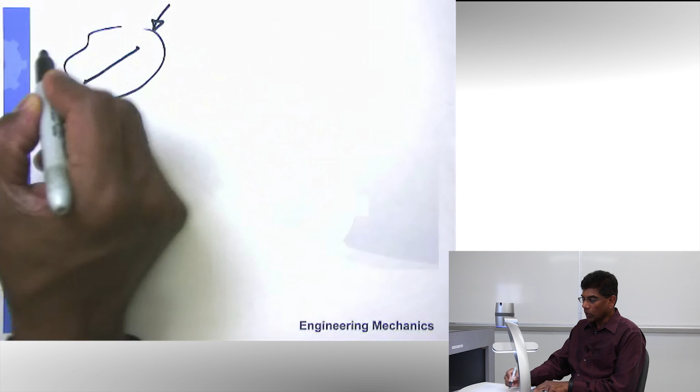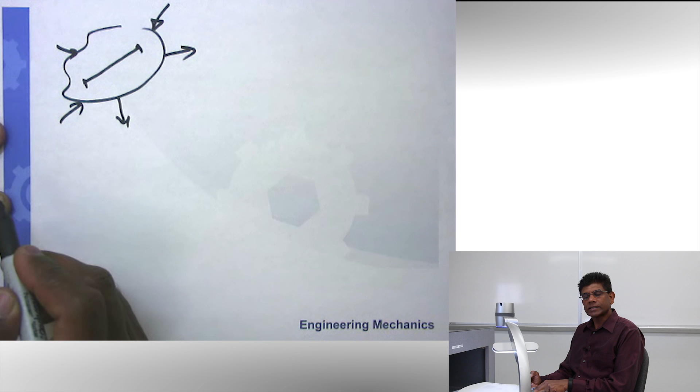And if you want a better way of explaining, here is an outline of a rigid body. I pick up 2 points on the rigid body, connect them by a line, subject this rigid body to some loading conditions, all right? And then I look at that line, it does not change the dimension. So a rigid body is a body that does not change its dimensions under the influence of forces. Any small internal deformation that takes place is not important from our perspective because it does not have any bearing on the static equilibrium. So that's rigid body, all right?

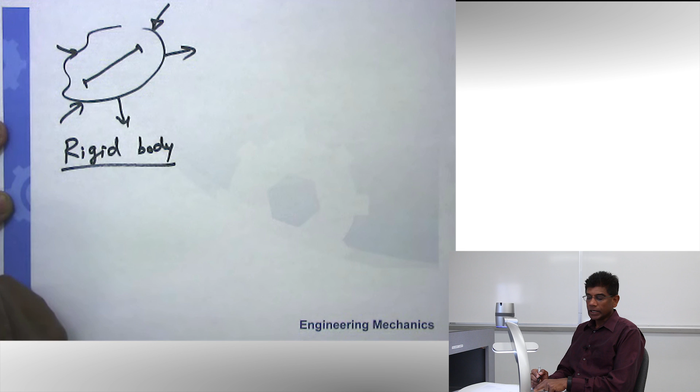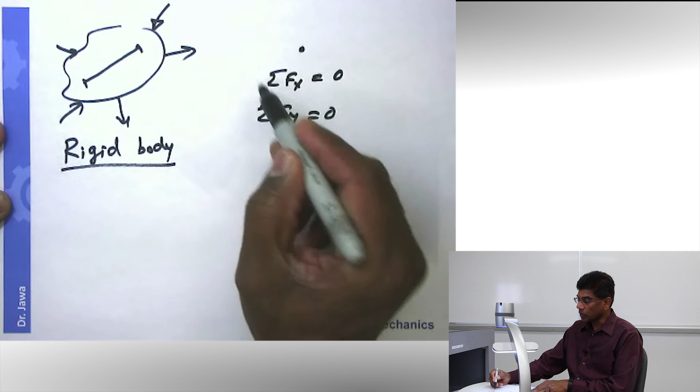Now, the next step is we briefly talk about the equilibrium conditions. Now, I want to draw your attention to what we talked before. We discussed particle equilibrium, meaning a system that is represented as a concentrated mass, and in those cases, we wrote the equilibrium equations as these: sum of the forces along x direction equal to 0, and sum of the forces along y direction equal to 0. In other words, we had two equations and we could solve for two unknowns. And we have done some examples and you understand that.

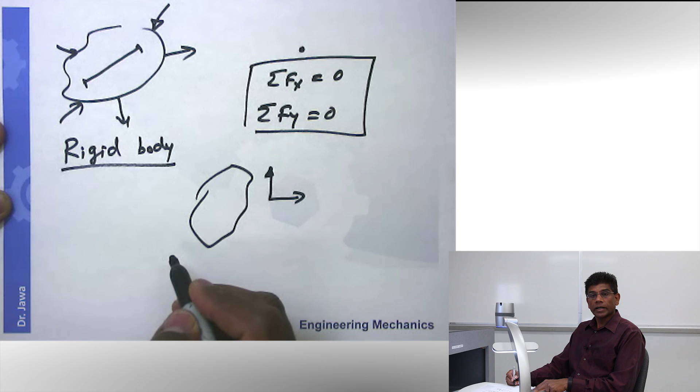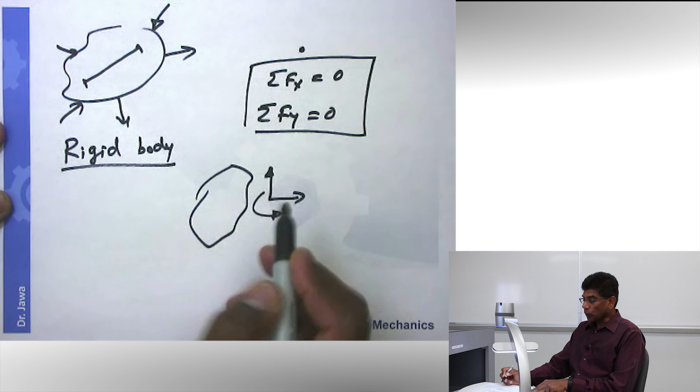Now, we are moving on to rigid body equilibrium. And in rigid body, we are considering not only the mass, but we are also looking into the dimensions. So this rigid body, in theory, will have motion along x-axis, motion along y-axis, and a rotation about z-axis. And therefore, in order for this body to be in equilibrium, we have to make sure sum of all the forces along x and y is equal to 0 as well as the moment.

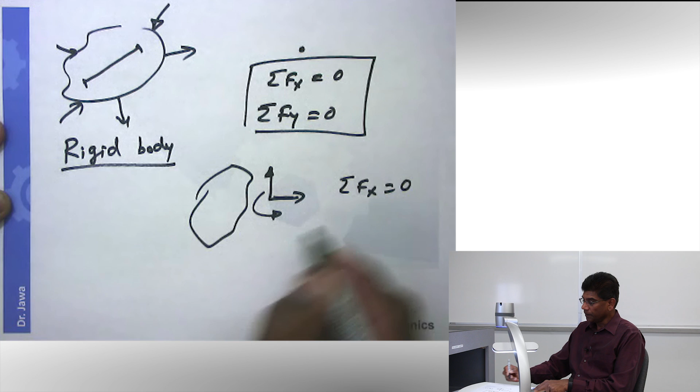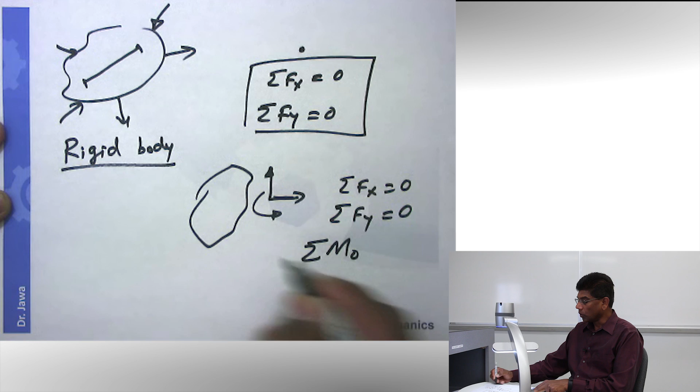So our equations for a 2D rigid body equilibrium will be sum of the forces along x direction equal to 0, sum of the forces along y direction equal to 0. I'm writing the scalar equations. And then sum of all the moment about a point, for example, O, equal to 0.

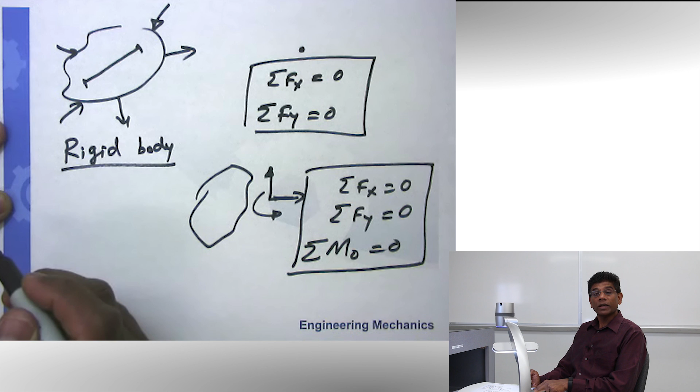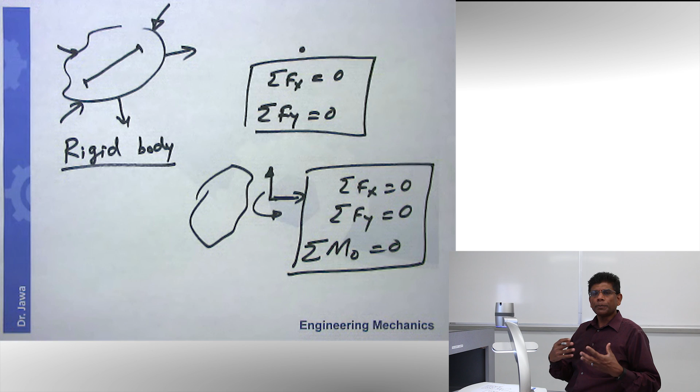So we will have three equations in case of two-dimensional rigid body equilibrium problem, meaning we can solve for three unknowns, all right? Lastly, when we look at a rigid body, these rigid bodies are not floating in space. In engineering, in fact, a body just floating in space is of not important. We like to get the bodies interconnected so they can do something useful. So all bodies that we talk about in engineering are somehow connected. So in this case, let's take a look at the supports that we are going to be considering in this subject. All right, so support reactions.

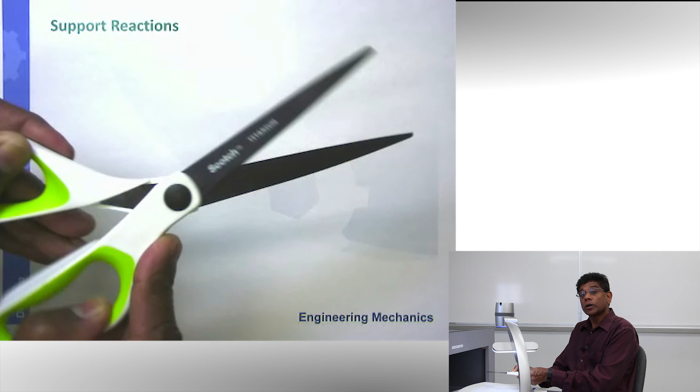All right. Now, I want to recall your attention to what I talked before. I showed you a scissor and I showed how a pin holds these two scissors. This is a pin joint. This pin joint allows only rotation. It does not allow any translation.

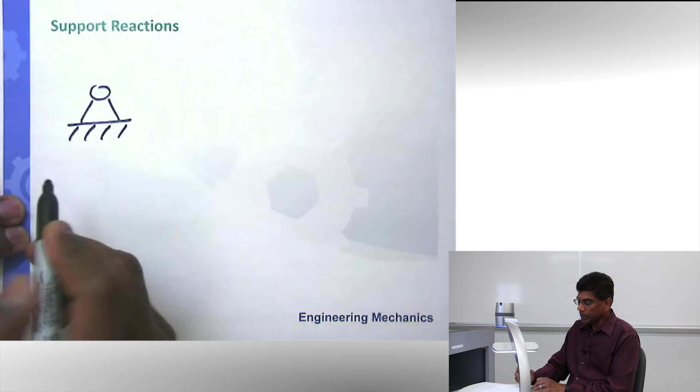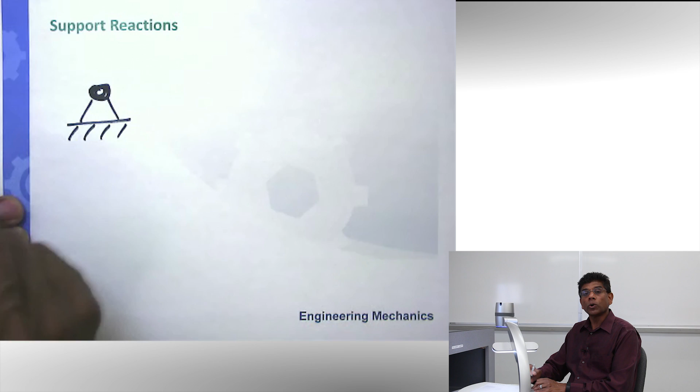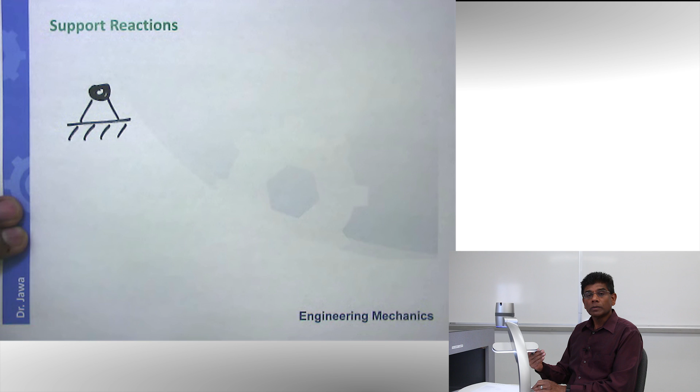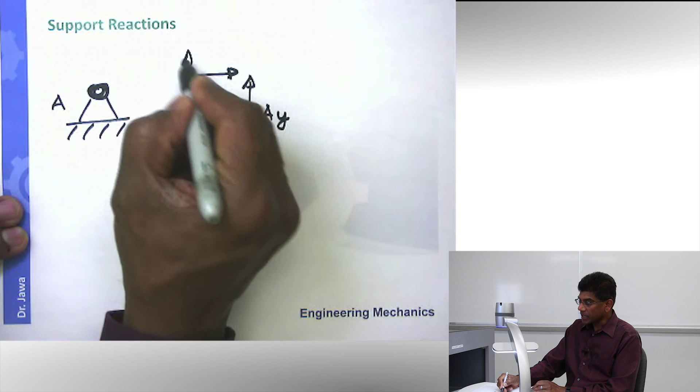If I want to represent that on a diagram, I draw the pin joint like this, meaning I can connect something through a pin, and the pin joint is represented using this diagram. It allows rotation, but it does not allow translation. That means there will be two support reactions: a reaction along X and a reaction along Y. I don't know the direction, so I assume it's positive when I don't know. So this pin joint can be replaced by two support reactions. For example, if I call this joint A, this is A sub Y and this is A sub X. So the pin joint will be represented by two support reactions.

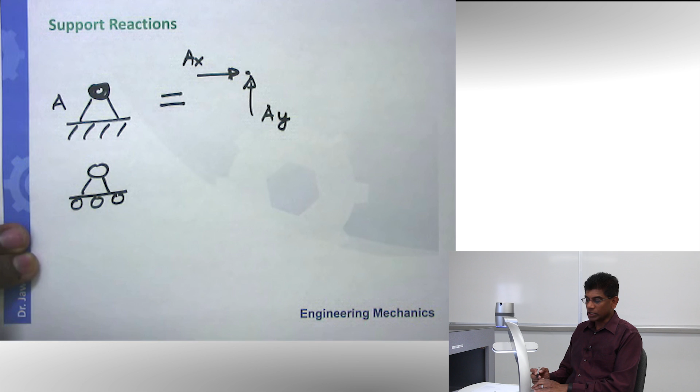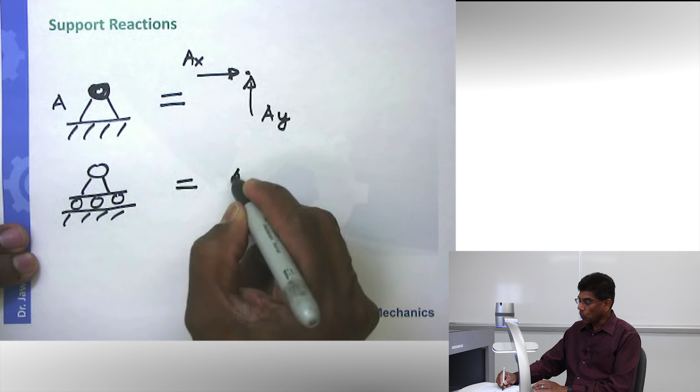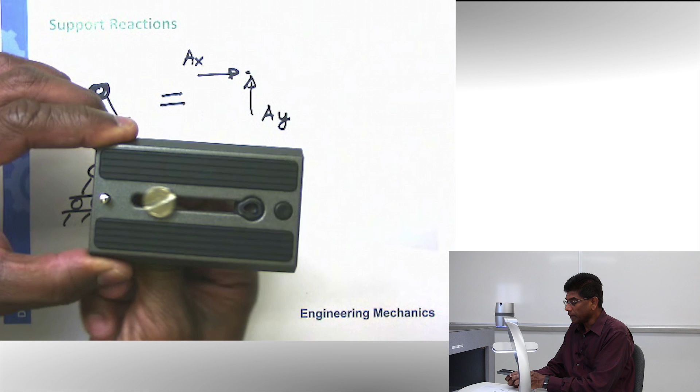The next support reaction I want to talk about is a roller support. Roller supports are widely used in engineering, meaning the body can actually move along one direction. A roller support is represented in many ways, but one way is to show something like a pin joint, but put them on rollers, meaning this body allows rotation and also allows horizontal motion. So this can be represented using just one support reaction such as A sub Y. For a physical example, take a closer look at this body. Here I have this pin which can move along the horizontal direction, but it cannot move along the vertical direction, and that's why you are getting this vertical support reaction.

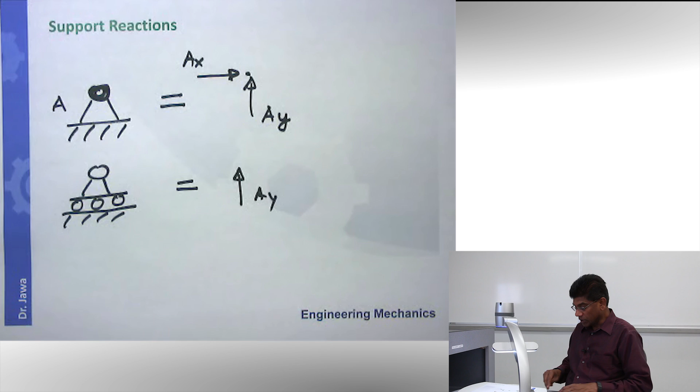So let's write this one. This is a pin support. This is a roller support.

There is another popular support I want you to understand: a fixed support. What is a fixed support? Basically you fix something like this, and you cannot move in the X direction, you cannot move in the Y direction, you cannot rotate about Z. It's fixed, like a tree in the ground, rooted, which is fixed and cannot move. That kind of joint or connection is very popular.

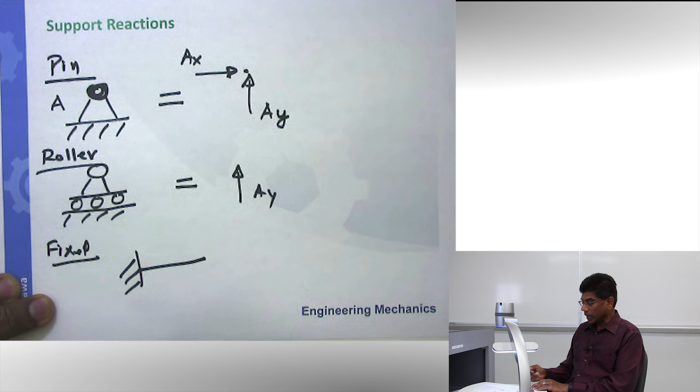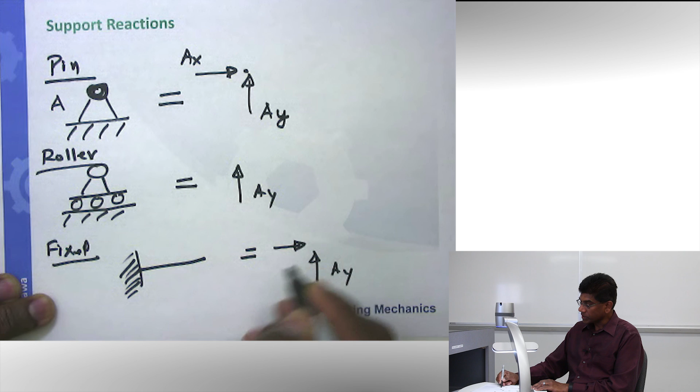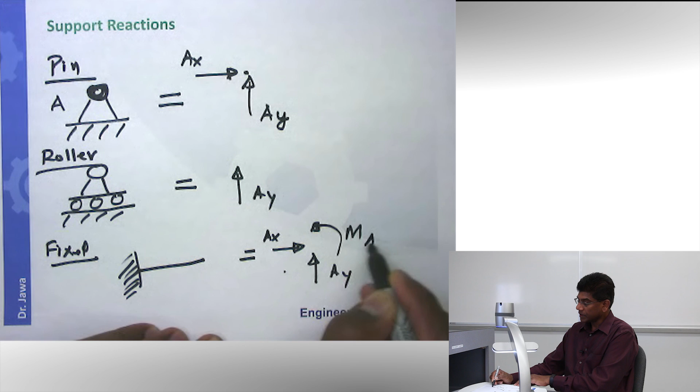Sometimes a fixed support is also known as a built-in support. How do I represent the fixed support? It is represented by a diagram like this, where a beam is stuck into a concrete wall, for example. This obviously eliminates all motions. Therefore, it will give you three support reactions: a support reaction along the Y-axis, a support reaction along the X-axis, and finally it eliminates rotation, which can be represented as M sub A. That's a moment, a couple moment.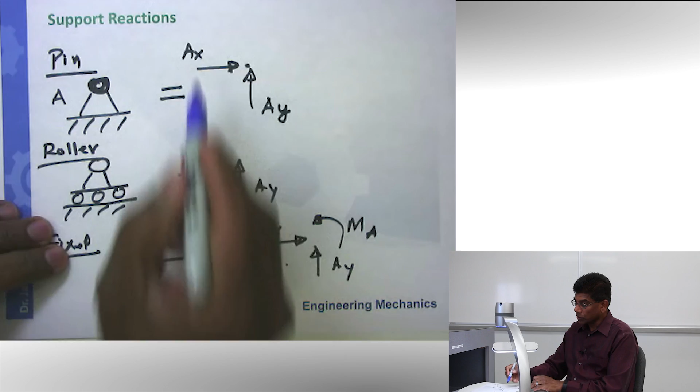So these are all popular support reactions that I want to make sure you understand: pin support, roller support, fixed support.

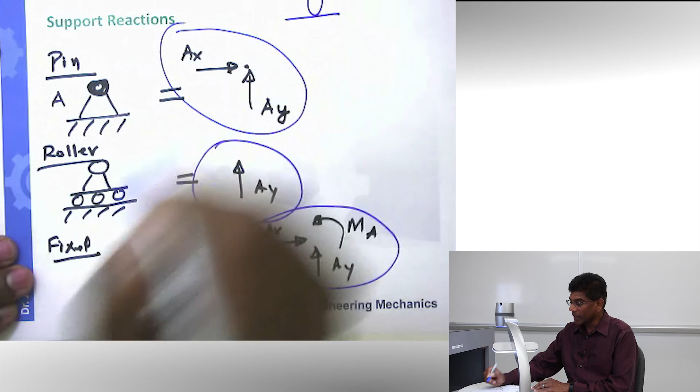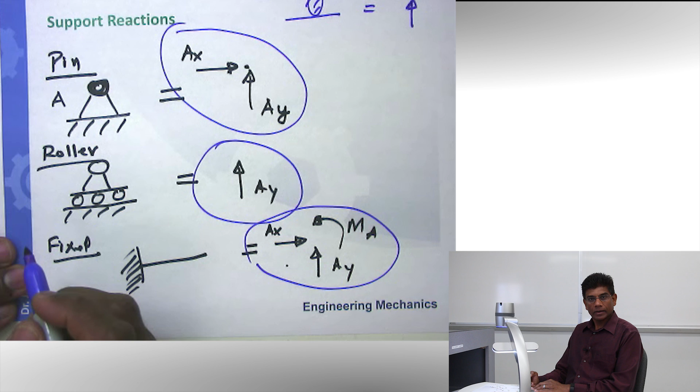In addition, you will also hear about a smooth surface. A smooth surface is like an icy surface, and if you stand on it, the surface supports you so you're not going down, but it doesn't help keep your motion away from the X or Y direction. In fact, you can move along, so a smooth support can be represented simply as a floor like this, and this is a body. If you want to represent a smooth support, it will be like a roller support with a direction along the vertical axis. If it is a rough support, you could have two support reactions. So a rough support would look something like this. So this is smooth.

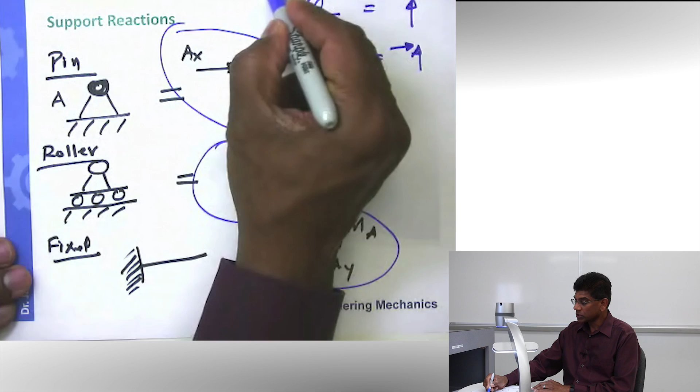This is rough. These are all the supports that I want you to keep in mind. There are numerous other supports. Cables are another support that we discussed a lot. When you are dealing with a cable, there is always tension in the cable, so you know the line of action of the force all the time. So these are all the popular supports.

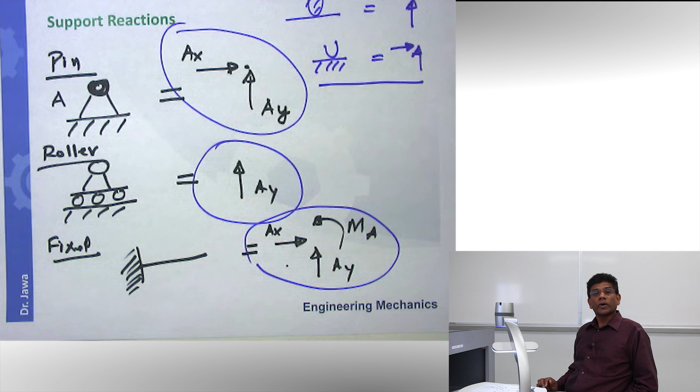Now take a look at an example that involves these supports, and we will solve for support reactions. Here is the problem.

This problem is taken from the popular Beer and Johnston text, 10th edition. It's a simple problem, and let's take a closer look at it.

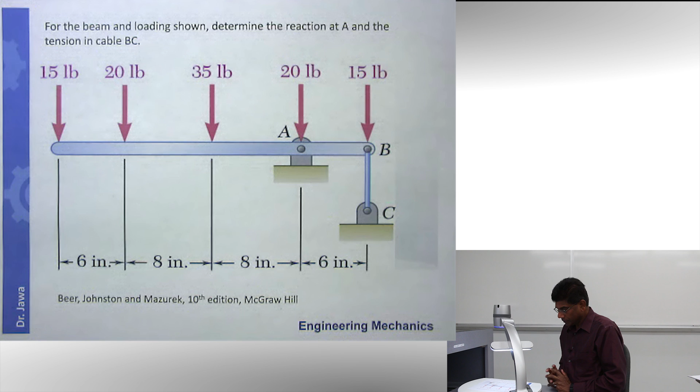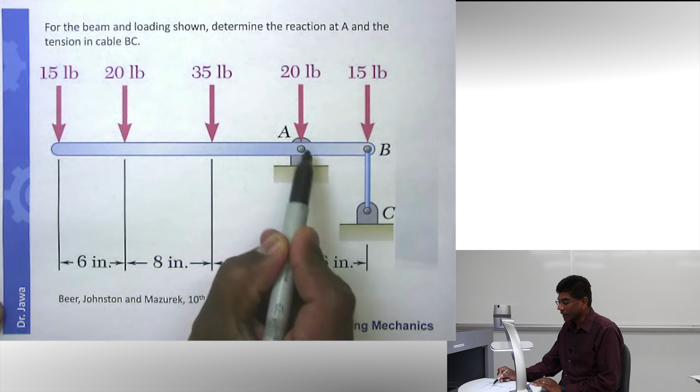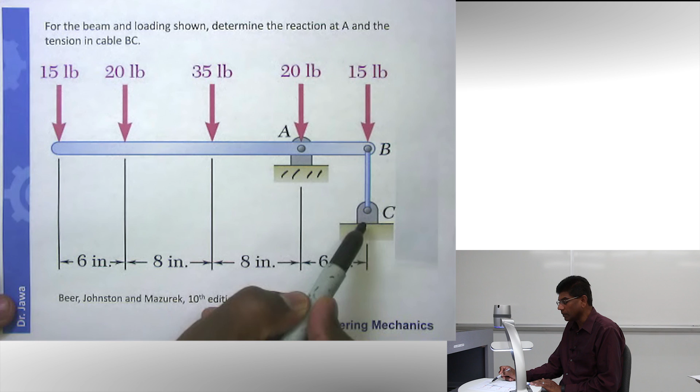We have a beam with a few applied external loads, and the beam is supported here by a pin joint. You can recognize the pin here, and this is your ground. Then the beam is supported by a cable, which is tied to something on the ground. Many students confuse this with a pin joint, but basically the cable is just tied here. So our interest is only the cable; we don't even have to worry about point C.

So how do we solve problems like this? The steps are going to be the same every time, and I want to make sure you completely understand and follow this. When we deal with static equilibrium problems like this, the first step is to draw a free body diagram, and we must do this properly step by step. A free body diagram is a self-contained mathematical model of a physical system; it has all the information necessary for solving. So we must draw a good free body diagram. If you make a mistake in drawing it, your equations will be wrong, and if your equations are wrong, you won't have the correct answer. So it's very important you draw a correct free body diagram.

After drawing the free body diagram, you will have to develop the equations and then solve them.

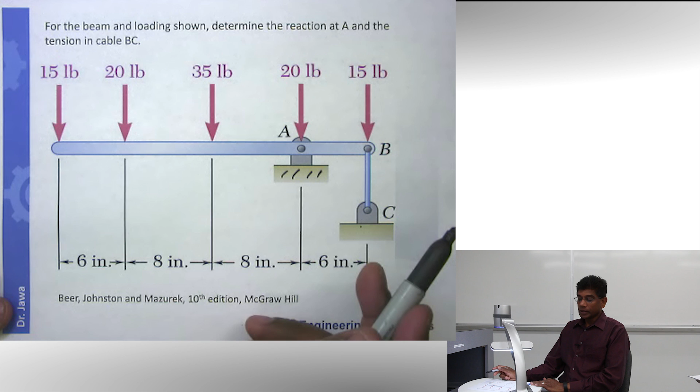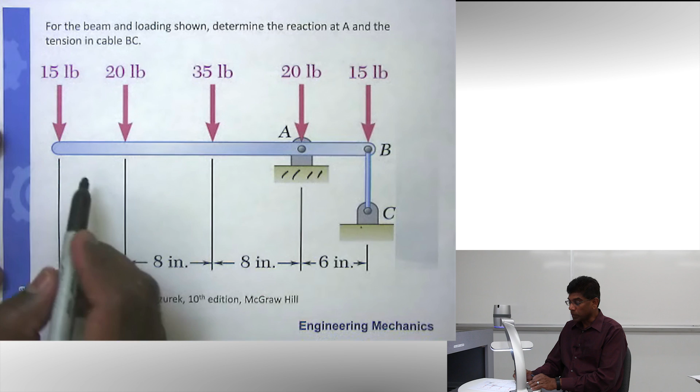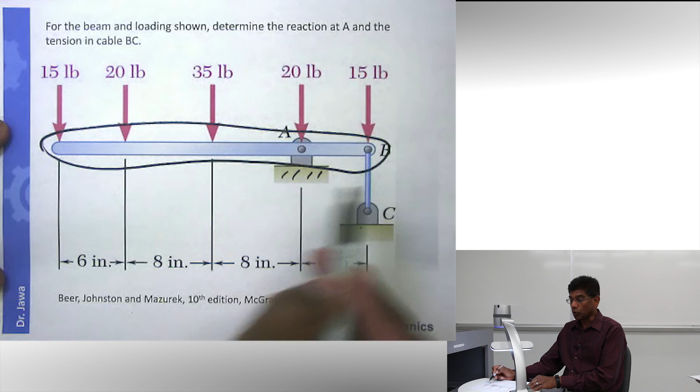Recognize the supports here: a pin support and a cable support. We are going to disconnect this body, or free this body. I want to show you the body—this is the body I'm going to free from the supports. In fact, that's where the word 'free body' comes from: freeing the body from other bodies or supports. In this case, there is only one body connected here, and we are going to free it from the support, and then draw a free body diagram.

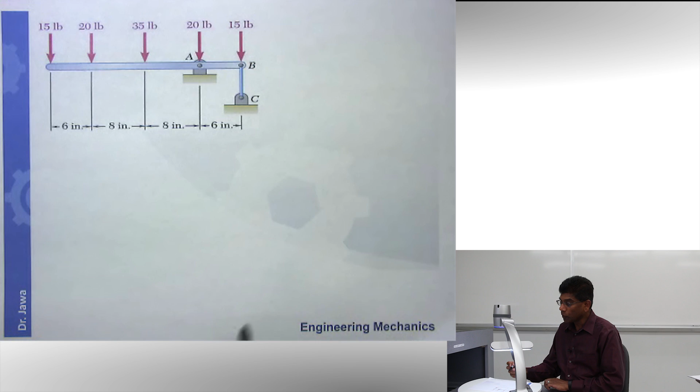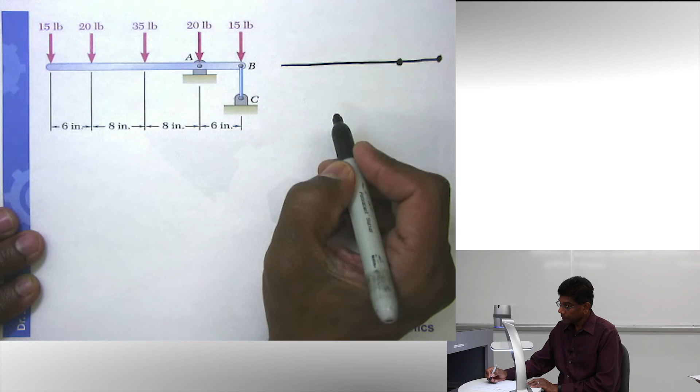Here is my body again, or the system again, in a smaller diagram, and I'm going to draw the free body diagram right here on the side, on the right-hand side. This is my point A, and this is my point B. I have not drawn this to scale, but it represents the free body of this beam.

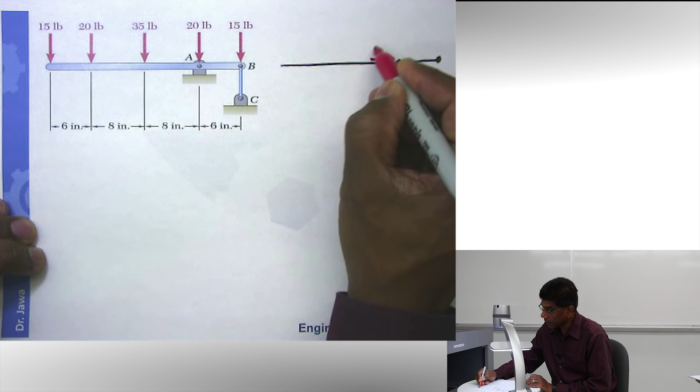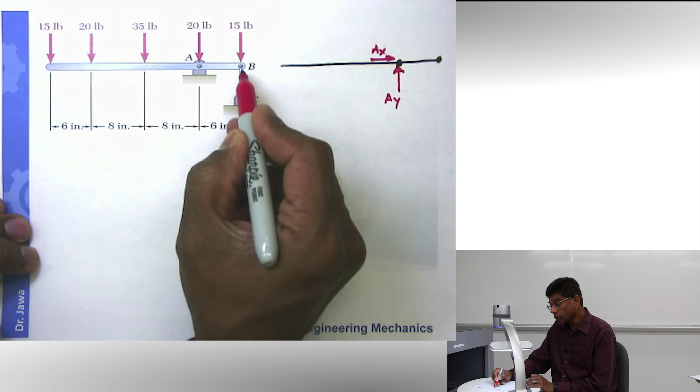As I told you, there's a pin support here, therefore it will have two support reactions: A sub y along the vertical direction and A sub x along the horizontal direction. That's the two support reactions from this pin. There is also a support reaction from the cable, and you already know the cable is always in tension. So if I disconnect the cable here, the tension will be in this direction—that's my cable tension, and I'm going to call it T because it is my tension. So these are all three support reactions.

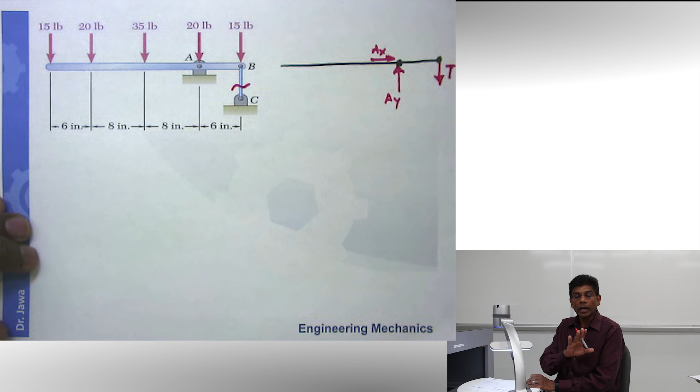Remember, in 2D rigid body equilibrium problems, there are three equations: sum of forces along x and y equal to 0, and moment about a point equal to 0. So there are three equations, and if you look at it, we do have three unknowns. So you should feel good that we can solve this problem in theory already.

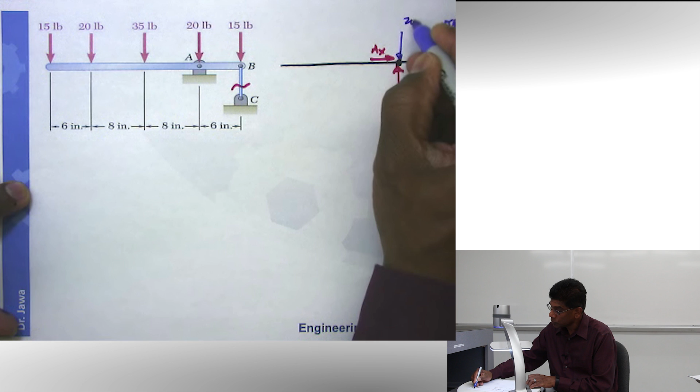Now, what else is not shown here? We have shown the free body, and now we have to show all the forces. I have shown the support reactions—that's the first step. Then I want to show all the external loads that are shown here. This is my 15-pound force, here is my 20-pound force, here is my 35-pound force, then I have my 20-pound force, and then my 15-pound force.

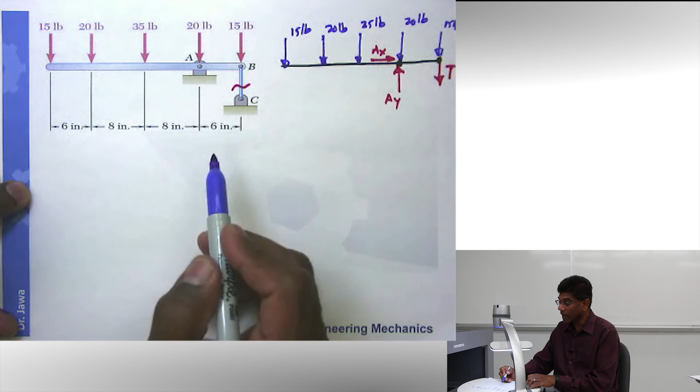So I have freed the body, shown the support reactions, and shown all the external loads. All the forces are shown and labeled, and my critical dimensions are right here. The only thing I have not shown is a coordinate system, so I'm going to say my coordinate system is going to be this, x, y. Now that's a complete free body diagram.

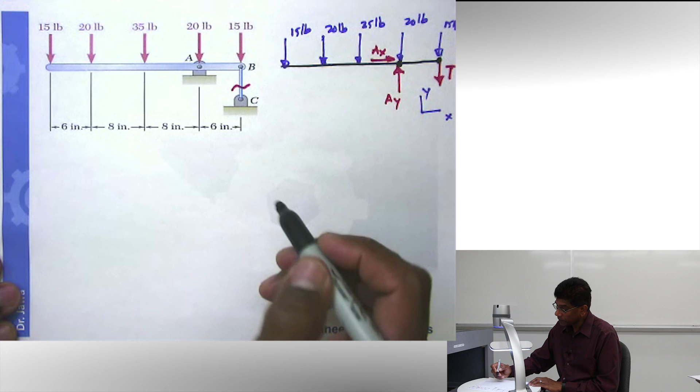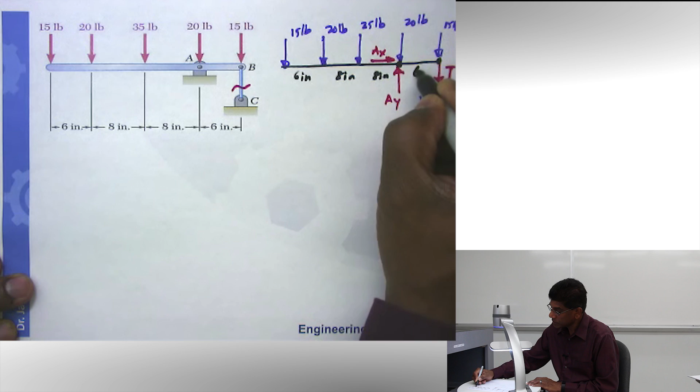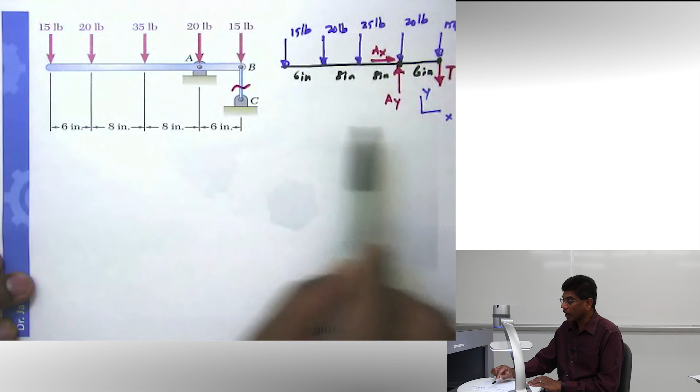With that information, I can move on to the next step. Strictly speaking, I should show these dimensions here: 6 inches, 8 inches, 8 inches, 6 inches. Now this is a complete free body diagram, everybody. Understand that once I have the free body diagram, I never have to look back at anything else—it must be self-contained, and I believe I have all the information necessary right here. So now the next step is developing the equations.

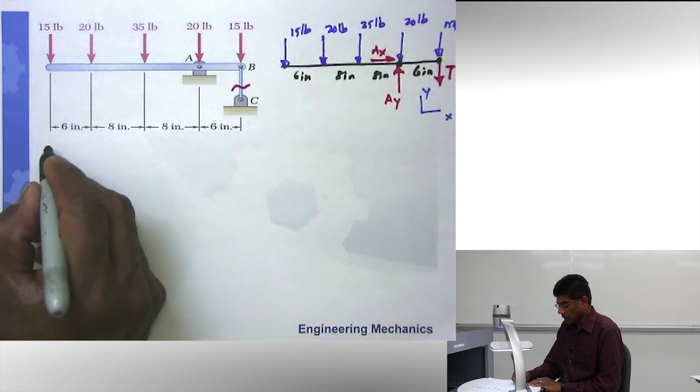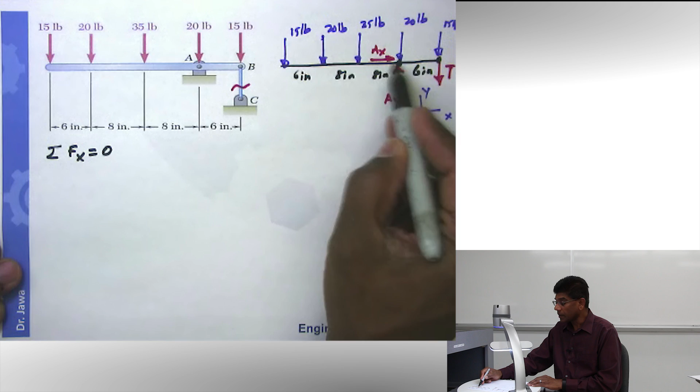Let's start with our traditional approach. Sum of the forces along the x direction must be equal to 0. If I look up, I have no force other than A sub x along x, and therefore A sub x equal to 0. That's my first equation, and that is also part of the answer, because the question is finding the support reaction.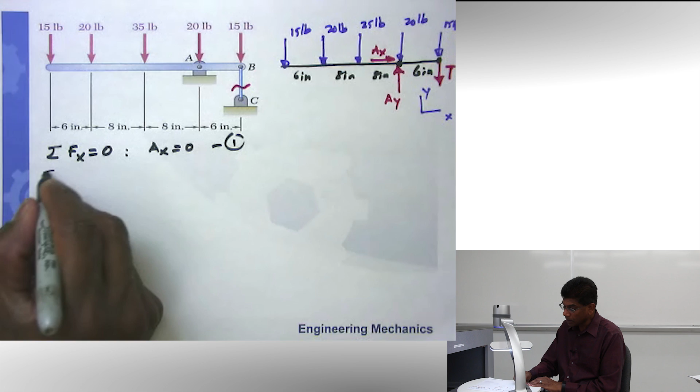Now I'm going to sum the forces along the y direction equal to 0. So I start with negative 15. Realize these are all in the negative direction: negative 15, negative 20, negative 35, negative 20, negative 15, all these applied loads. Then I'm also going to have support reaction positive AY and a negative T equal to 0.

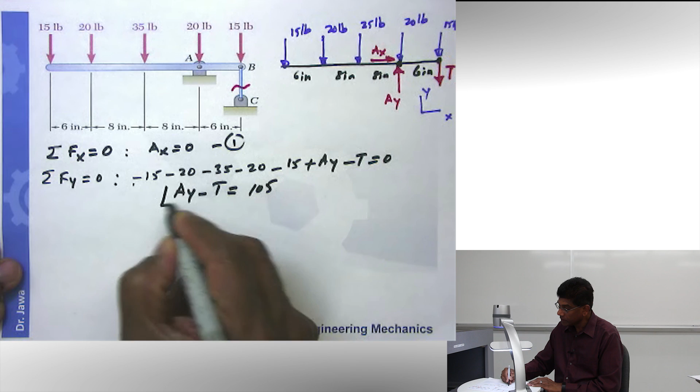I can reorganize this, keeping unknowns on the left-hand side and the known constants to the right-hand side, giving AY minus T. If you add up all this, 15, 20, 35, 70, 90, 105, this is my second equation. It has 2 unknowns, so I cannot solve it. I'm going to go to the next step.

The next step, the easiest thing, would be to take a moment about any of these points. I'll take moment about point B. If I do that, I won't have any moment due to the force T, tension, because there is no moment arm. I'll be able to calculate all other moments, and since there is only one unknown, I'll find A sub y immediately. Alternatively, some of you might take moment about point A, which would be fine as well, in which case you'd find T first.

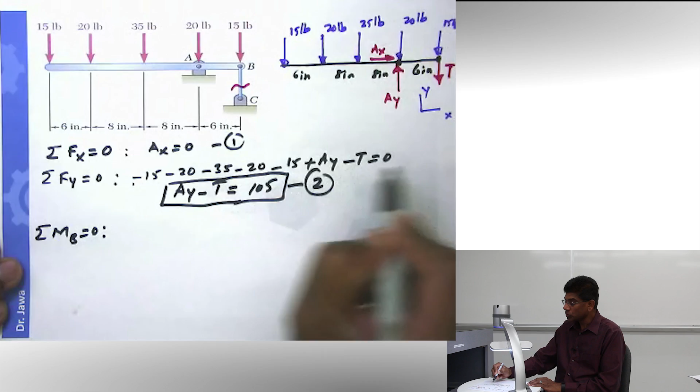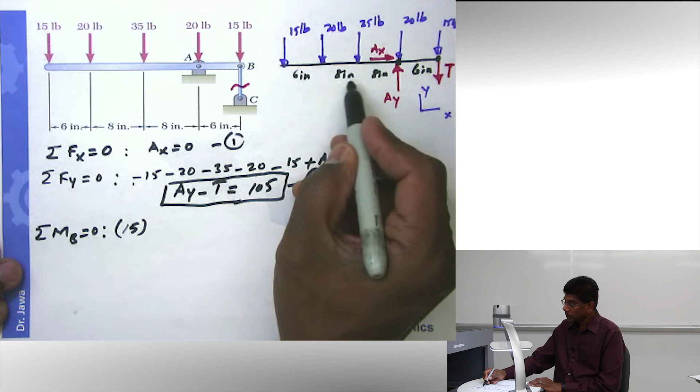So let's take the moment about point B, equal to 0. I'll start at one end and keep going so I don't miss any forces. The 15-pound force gives a counterclockwise moment, as you can see. So it's 15 pounds times this distance, from here all the way, which is 6 plus 8 plus 8 plus 6, giving 8, 8, 16, 28 inches.

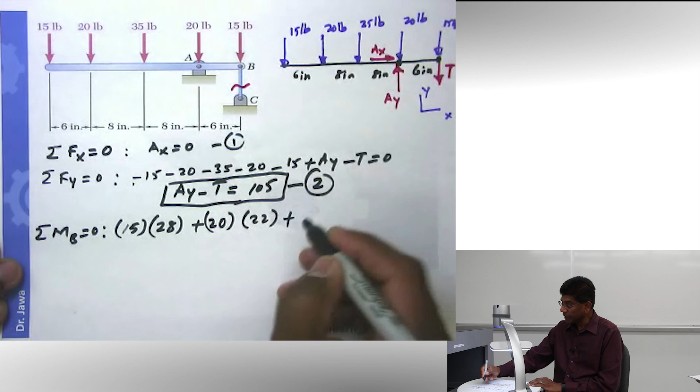Then I move on to the next force, the 20-pound force, which again gives a counterclockwise moment. So plus 20 times this distance, 8, 8, 16 plus 6, 22, plus 35, which also gives a counterclockwise moment, equal to 35 times 14, plus 20 times 6. I'll continue on the next line. Now I'm done with all these forces.

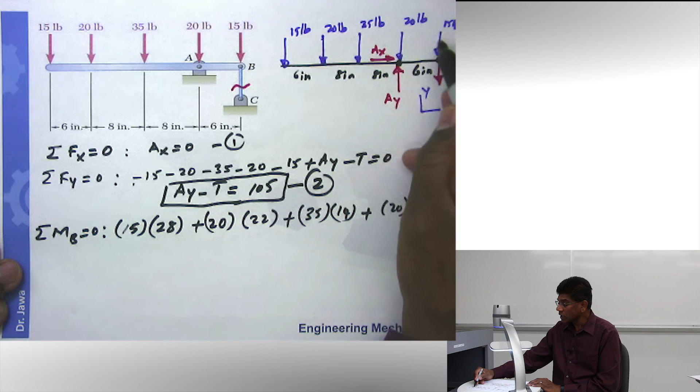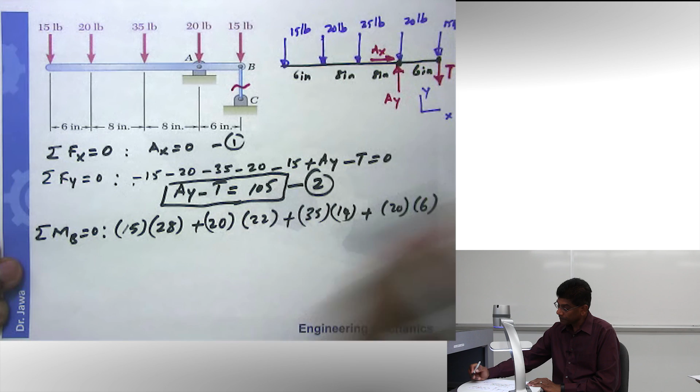This 15-pound force won't give any moment because it's right at point B. T won't give any moment, and AX obviously won't give any moment either. So the only remaining unknown support reaction in this equation is AY, which is actually going to give a clockwise moment since it's directed upwards. So it's negative AY times 6 equal to 0.

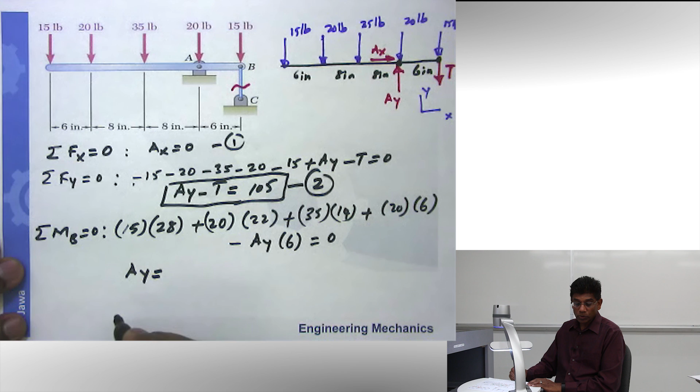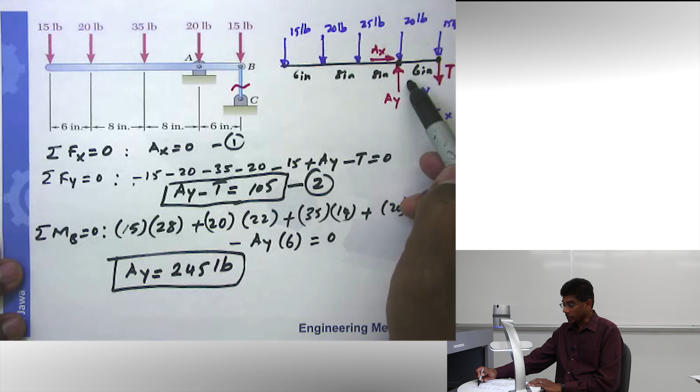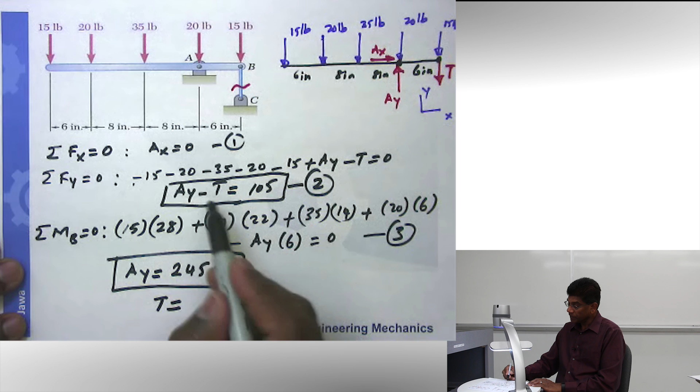I'm not going to spend time expanding this right now; you can do it yourself with a calculator. If I solve that, I can calculate AY right away, and if you did your math, it comes out to 245 pounds. So this moment equation immediately gives me the answer for this unknown support reaction. This is my third equation. Now I can go back and substitute this 245 value, and I find the tension to be 140 pounds.

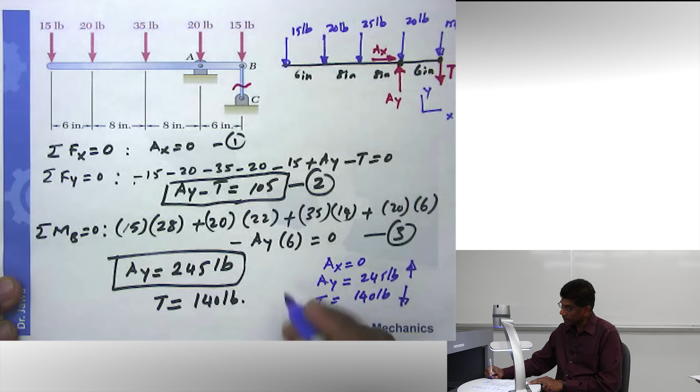If you've done this correctly, with my free body diagram and equations, the final answer is: A sub x is equal to 0, A sub y is equal to 245 pounds in this direction, and finally tension is equal to 140 pounds in this direction. And here is my answer.

So I have solved a simple beam problem involving 3 support reactions. That's all we have to do about this problem. Let's move on to the next example.